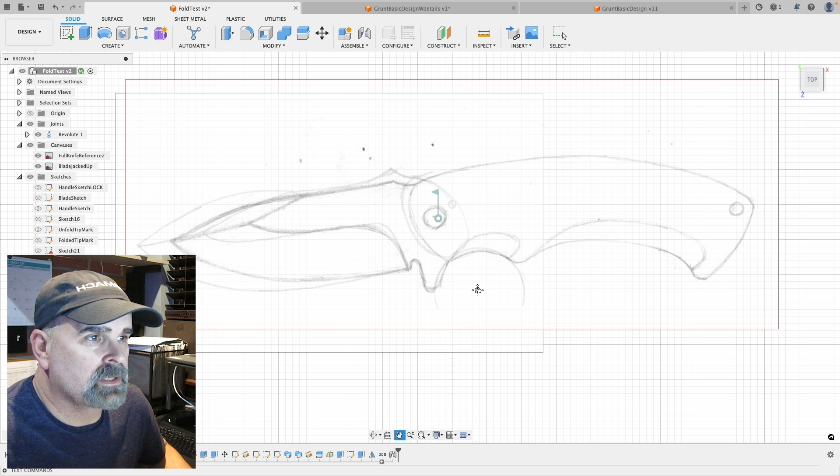Okay, so the first thing I did was I imported the sketch of my knife into Fusion 360 using the Canvas import, and along the way I drew the blade a little longer because I realized it was too short. So this is my sketch, and then after that what I did was I did an outline around the sketch. So let me show you what that looks like now. So there's my handle, one of the handle sides, and then my blade right here. Let me take away the sketches so you can see those clearly. So then that's what I had. I sketched that out carefully around the edges.

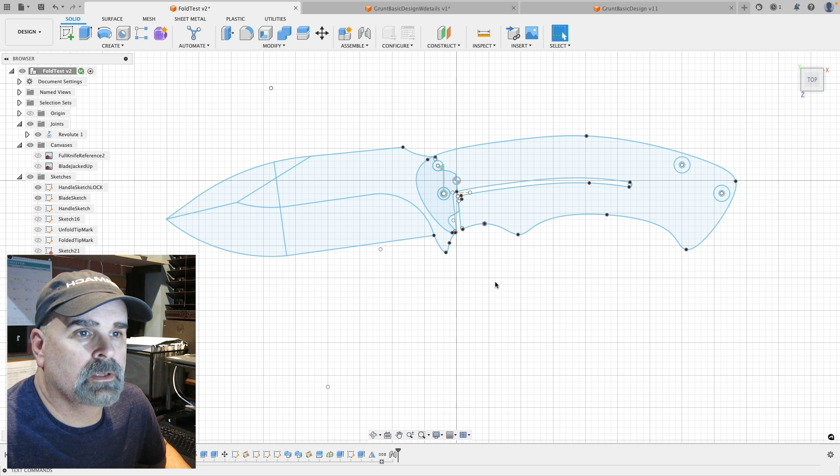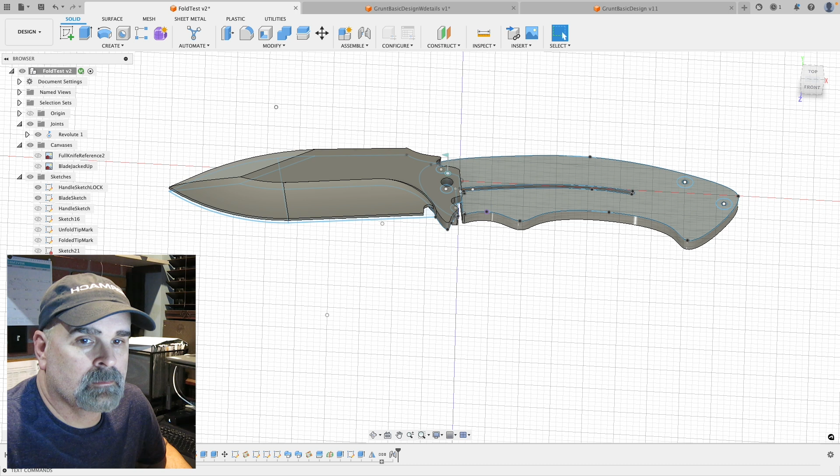That took a while to figure out, but maybe I'll do a video on exactly how I made this knife in the near future. So after that, as you can see, this is just a flat sketch on a flat plane. So the next thing I did was I extruded these sketches here. So let me show you what that looks like. The blade, extruded that, and both sides of the handle. And obviously I'll move those where they are supposed to go. So this is my knife. Let me remove the sketches so you can see that better. Alright, so here it is right here.

I like it. I like the way it looks. I like the flow of it. Let's see what it looks like when it's folded. So I'm going to grab this blade here and whip it around. Alright, I like that. I'm acting like it's the first time I saw it, but it's not. I've seen it plenty of times. But I really like the look of this folded knife.

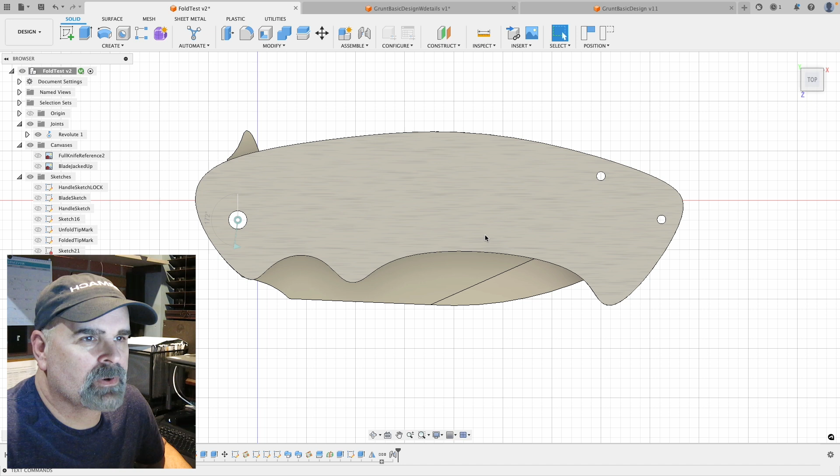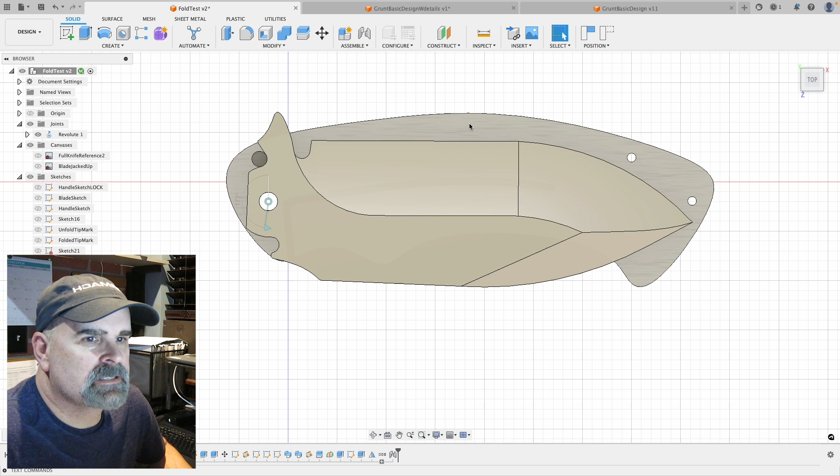Let me remove this top handle piece and show you something here. So this is the blade folded. Stopper pin right there stops it from going any further. And probably what I'm going to do is move this hole out here to the belly of the handle, the belly of the beast right here, so they're all evened out. So 3 points of attachment here for the handle, make it more rigid. I noticed earlier today that this piece of the blade actually sticks out beyond the handle, so I'm going to adjust that a bit too. And these are rough measurements, so I will have to make a lot of adjustments, I'm sure.

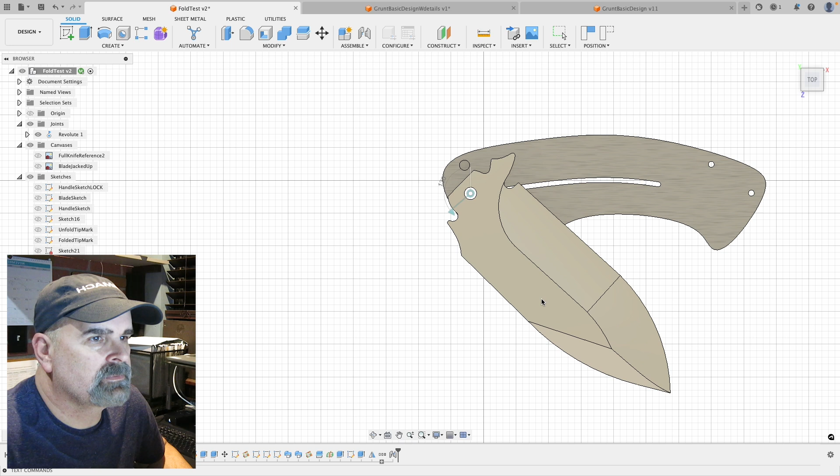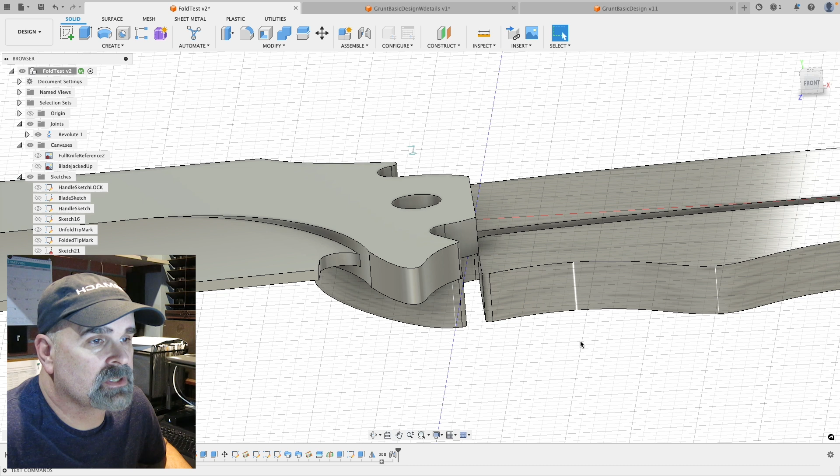So we fold it back out, and boom, it stops on that stop pin there. I need to figure out the angle of the back of this blade. I'll extend this out a little bit more, and then I'll start off with a 7-degree angle here. Bought a 7-degree tapered ball end mill today, so I'll wait for that to come in for the mill. I may have to adjust that, not sure. It's all going to depend on how this prototype machines out.

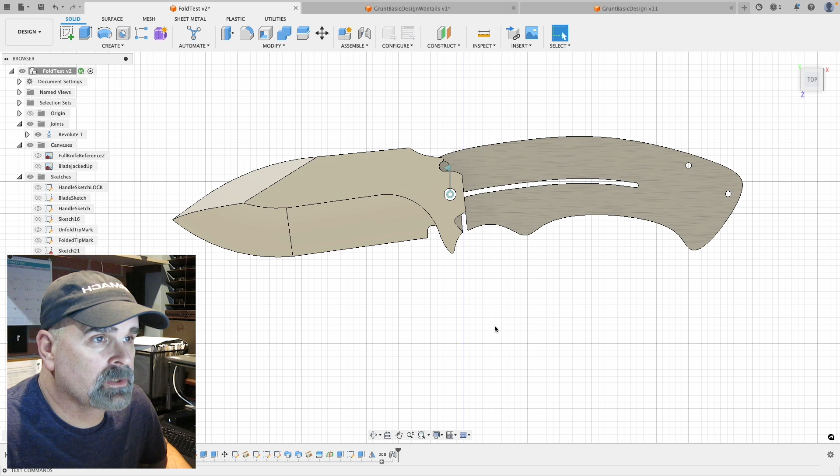And so for the hardware, eventually I want to machine all the hardware, of course, except for the bearing. Can't machine that. But for right now and for just the prototype, I'm going to buy all the hardware. Actually, I did that earlier today. I purchased from Alpha Knives the 0.187 inch flat head pivot. I also purchased the pivot screw that goes on this side of the pivot. So I'll adjust the model accordingly to fit that. I also purchased some bearings and some stainless steel washers and some stopper pins.

And then I couldn't find any backspacer standoffs. So I found some that I liked on knifekits.com. These here are 0.19 inches tall. So I think that's going to work out. My blade is going to be about 1/8 of an inch thick, maybe a little more. So yeah, definitely going to have to do some fine tuning after I machine this first prototype, but I don't know until I machine it what I need to adjust.

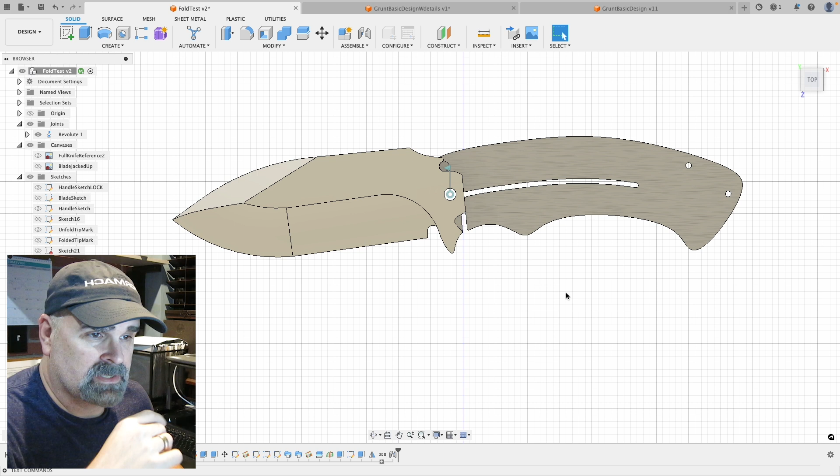I am going to add some details to this knife here. I'm going to put some texture on the handle, or do something. I know I want to put a slanted bevel on these hand indentions here, slanting them back toward the back of the knife. But I'm not sure what else I'm going to do. Probably put a logo right here on the blade.